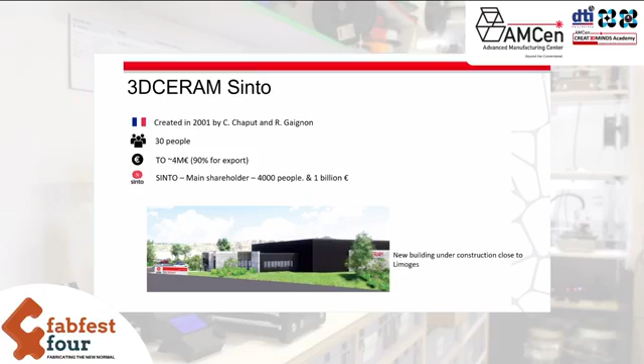We mostly work with a network of distributors and also some subsidiaries of 3D Ceram Sinto. As I told you, our shareholder Sinto is based in Nagoya, Japan. We also have a joint venture in China since 4 years, and a subsidiary in the USA since 2 years in Connecticut. We have more than 30 partners all around the world.

So let's come back to the topic of the day. I think one of the first questions is, what is technical ceramics? People know well plastic, know well metal, but not yet technical ceramic. So we try to answer this first question.

Among the most innovative materials, advanced ceramics are playing an increasingly important role because technical ceramics provide reliable solutions when metal and polymer have reached their limits. Today, technical ceramics have become indispensable to state-of-the-art industries thanks to their unique properties, which could be mechanical, electrical, thermal, optical, chemical, aesthetic, and so on. Due to these properties and their qualities, they are now one of the highest performing materials, allowing a wide range of applications in various business sectors.

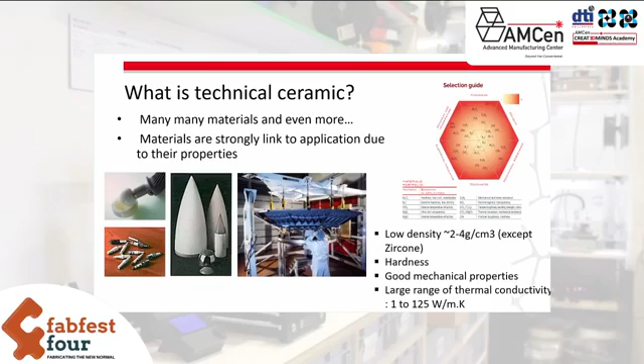This is why high performance and innovation enable advanced ceramic today to address the most complex industrial challenges, as I will explain in the next slide. You have to keep in mind that there are a lot of processes to shape technical ceramics, but all the processes use the same method.

We start with a powder, a raw material, then we have to shape the powder, and then do a firing to obtain final properties. There are many technologies to shape ceramic, such as injection, milling, casting, extrusion, and so on. There are clearly a lot of processes, but all of them need tools and molds, and not 3D printing. This is a big advantage of technical ceramic additive manufacturing compared to all the other processes.

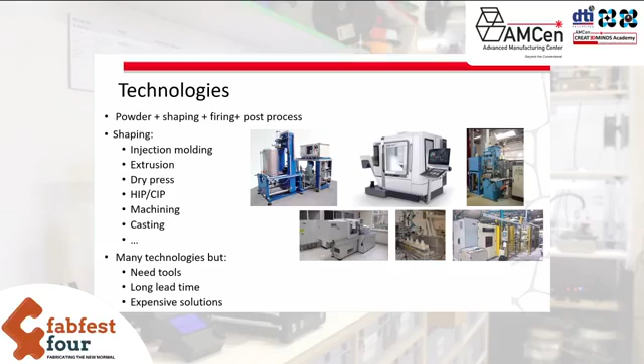With 3D printing, as you know, you do not need any tools or molds in order to shape ceramic, but also metal or plastic. You have to keep in mind that the activity and know-how of 3D Ceram Sinto is to provide solutions for the 3D printing of technical ceramics. At 3D Ceram, we are only focused on technical ceramic parts.

As Angela told you, I am a ceramic engineer. Our two CEOs are also ceramic engineers. So at 3D Ceram, we are a team of ceramic engineers, and we have been only focused, for 20 years, on the printing of technical ceramics.

This is why we have printed ceramic parts on demand since 2001, thanks to an SLA process, stereolithography, that we developed internally. And since 2015, we decided to provide an entire printing line to our customers. Printing line means the printers developed by 3D Ceram, the materials - a mix of ceramic powder and photosensitive binders, also developed by 3D Ceram - and the post-process equipment if necessary, but also some services in order to help and assist our users.

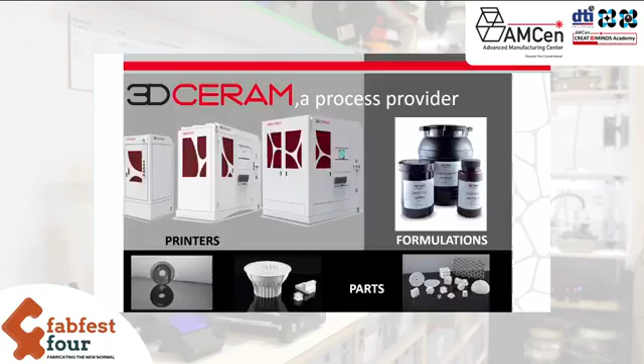So at 3D Ceram, we like to say that additive manufacturing for technical ceramic is a disruptive and complementary technology. Thanks to the benefits of additive manufacturing, it is possible to decrease development time, and so at the end, the time to market. Also, you can produce and shape new designs that you cannot do with any other processes.

As you just need the CAD file of the part, you can do on-demand printing as you do not need any tools or molds. One of the main advantages of additive manufacturing for all materials - plastic, metals, and ceramic - is that you only need the CAD file of the part. But on the other hand, as I will show you, it is still a process with a post-process step and a low output capacity compared to some traditional processes such as injection. This is why I call it an inspiring technology.

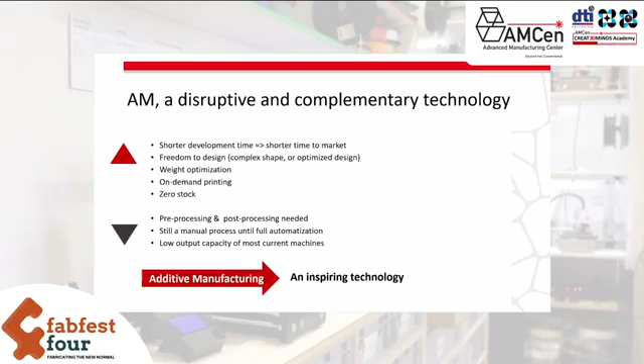Before explaining the process, I want to do a quick focus on what we can call the ceramic AM benefits and the design to function. I will explain it for the ceramic part, but I'm convinced it is the same for all materials. If you want to do the same parts that you are doing right now, don't think about 3D printing - it will bring nothing. You will not reduce the cost. If you are comparing A to A or B to B, forget it. You really need to change something.

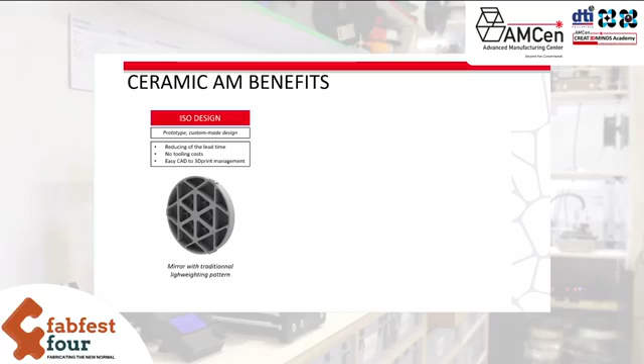So there are three ways to go. Either you start with ISO design - you change nothing, and you hope that by saving molds and tools you can reduce the cost. That's what we call ISO design. Or, second option, you create a new design with new functions inside, which are difficult to make. This doesn't mean it's a complex shape - it means it's a new design that you are not able to do with current technologies.

Or there's what we call disruptive design, when we integrate even more functions and optimize the concept. You may have, for example, different parts combined into only one part. On this slide you can see an example of a traditional part and what we end up with - we decrease the weight and get better mechanical resistance of the structure. In my opinion, this point is very important: now, thanks to 3D printing and additive manufacturing, we have to design the part according to its function, not according to the process that we have in-house.

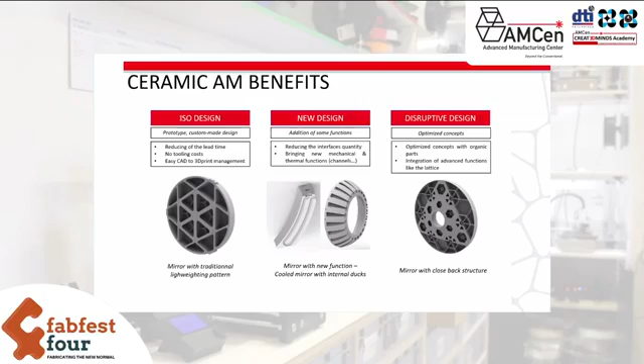Another promising point is the diversity of the market. Quite all the markets - medical, space, energy, automobile, aeronautic, chemistry, and so on - are investing in the process.

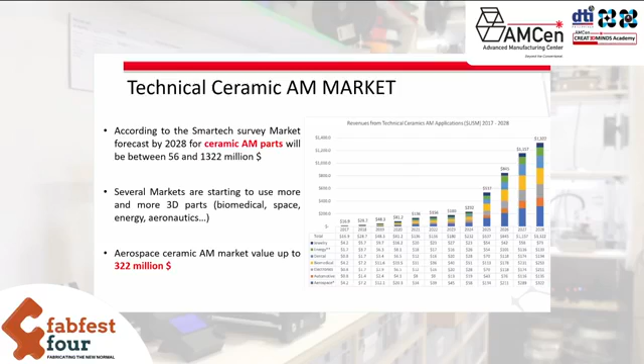Just before explaining more specifically the SLA process developed by 3D Ceram, I want to say a few words about the different processes to 3D print technical ceramic. Those processes can be classified into 5 major families according to the type of method.

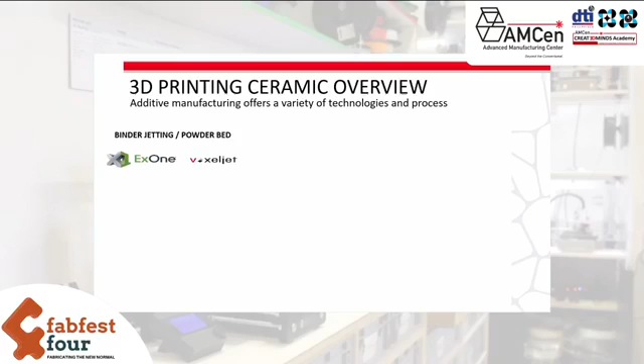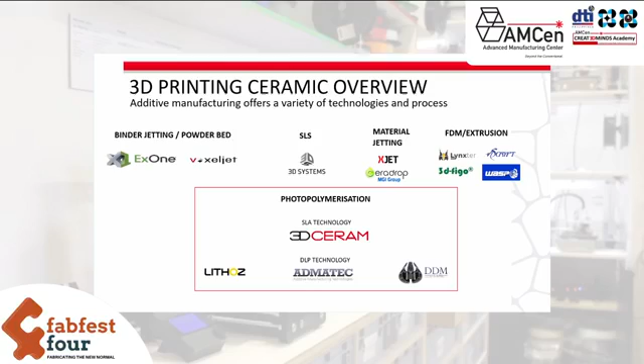You can find binder jetting process, selective laser sintering called SLS, material jetting, material extrusion, and stereolithography, SLA. There's no almighty process - each has its own advantages and disadvantages. The most important thing to consider when choosing the right 3D printing technology is the kind of part the user wants to print. I'll explain on the next slide the interest and advantages of the 3D Ceram process.

A few words regarding the SLA process that we developed. The stereolithography process developed by 3D Ceram uses photopolymerization of materials thanks to a UV laser, very low power, based on the top of the printer. As I explained, the material we use is a mix of ceramic powder and photosensitive binder, and each layer is cured by the UV laser.

The first step is to create the CAD file of the part - nothing special. Then the printer software will slice the part in order to indicate to the laser which area to cure at each layer. Then the printer will print the parts layer by layer, from the bottom to the top.

A blade will spread a thin layer of paste on the printing platform, and the UV laser based on the top of the printer will polymerize the area to be cured. Then the printing platform goes down by one layer thickness. The blade spreads another layer of paste, lasering again, and so on, in order to shape all the parts layer by layer, from bottom to top.

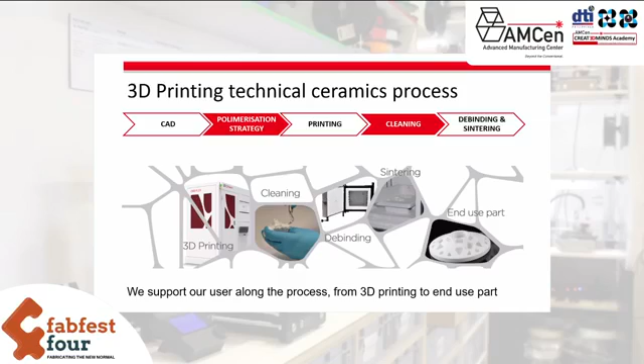After printing, the part is made of a mix of ceramic powder and polymerized binder. This is why we have to do two thermal treatments: first debinding, in order to burn out the binder, then sintering in order to close the porosity and densify the ceramic. It's during the sintering process that we have some shrinkage, between 10 and 20%, which only depends on the chemistry of the formulation.

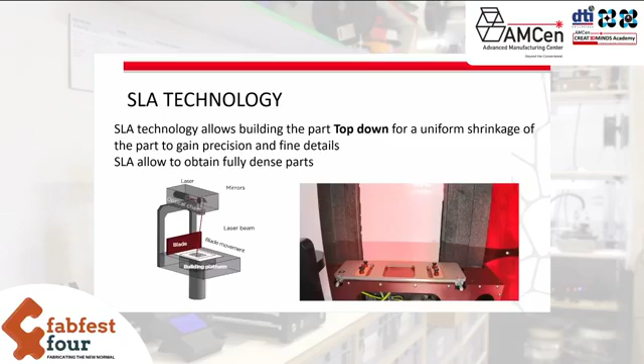So the SLA process developed by 3D Ceram uses a UV laser on the top of the printer, and as I told you, we print the parts from bottom to top, as you can see in the video. The combination of top-down process and UV laser on top allows us to obtain fully dense parts with very thin details if necessary, but also uniform shrinkage during the sintering step.

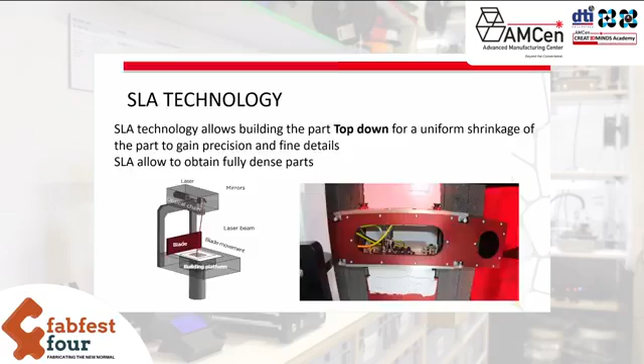One of the main advantages of the SLA process developed by 3D Ceram is the lack of links between the parts and the support. With almost all other processes for metal, plastic, and other ceramic 3D printing methods, you need links or pillars between the parts and support, which require a lot of manual work during post-processing, and also a lot of risk for the ceramic parts.

Thanks to the top-down process and the viscosity of the slurry, we do not need any links between the part and the support, as you can see in the picture and the video.

For example, if we want to print the white part, we design the support in red, and during the printing run, we have a very small gap of uncured slurry between the part and the support. So we don't have any links, any pillars. This is why, after printing, it's very easy to remove the support and just take care of the part.

Making the post-process easy and user-friendly is one of the key points for the adoption of the process by key players and industrial groups.

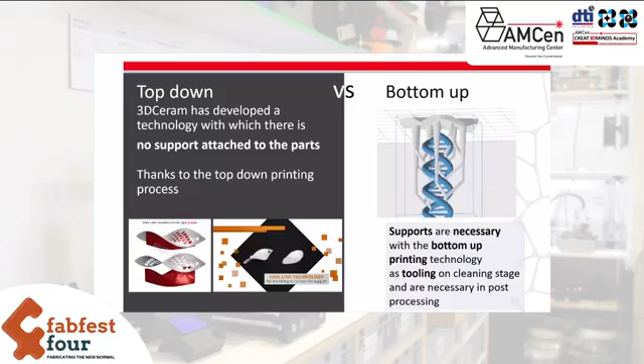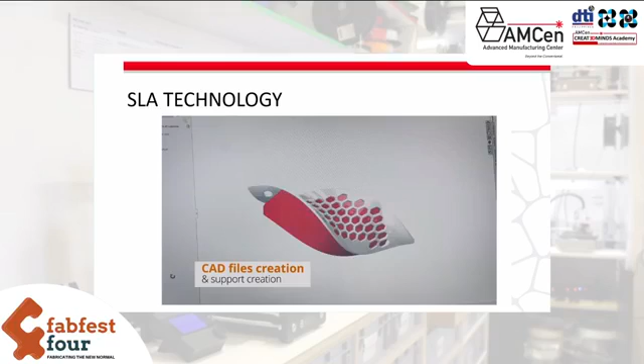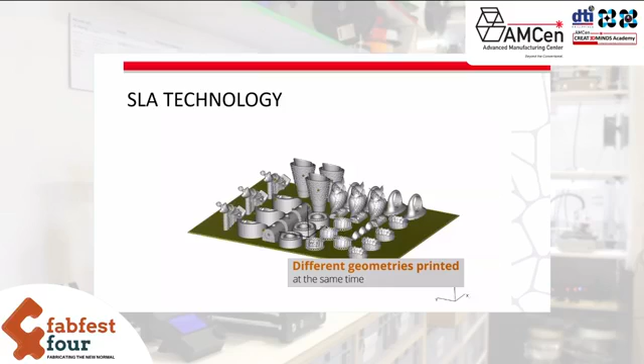Now, I want to show you a short video of the process. As I told you, the first step is to design the part and the support with any design software, could be SolidWorks, CATIA, NX, and so on. Then we send the STL file to the printer software, and the printer software will automatically slice the parts. Slicing means indicating to the laser which area to polymerize at each layer.

Let's have a look into the printer. You have a tank for the paste, the mix of ceramic powder and photosensitive binder. The printing platform is in the middle of the printer. There's the recoater with a blade in order to spread the paste on the printing platform, and the UV laser, very low power, based on the top of the printer.

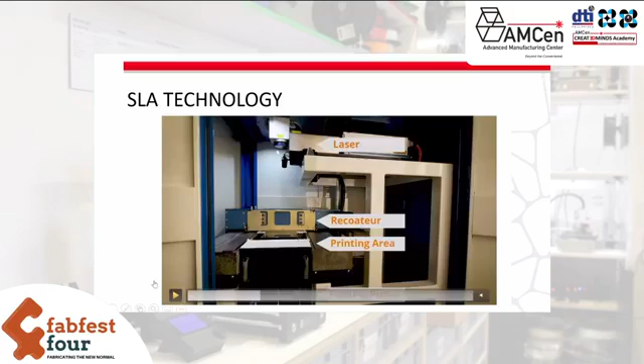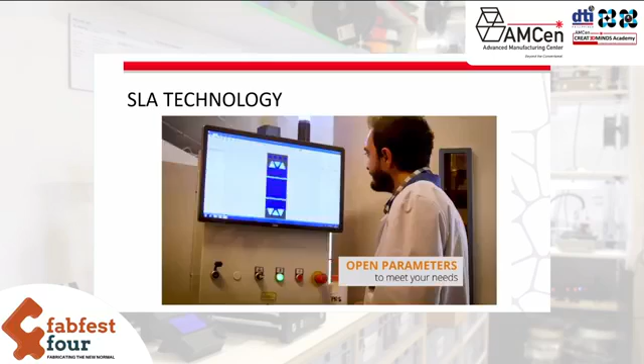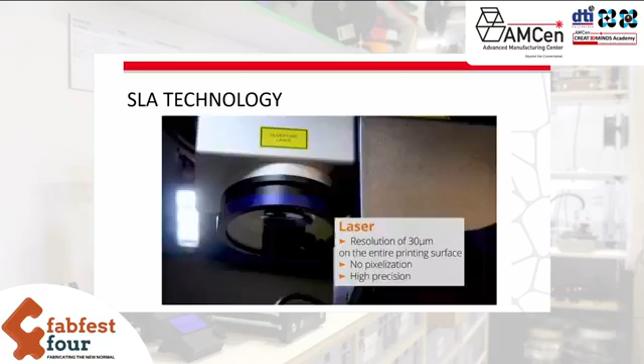I will explain later, but we can have different sizes of printing platform with this printer. You can see the high viscosity of the slurry. At the beginning of the printing run, the blade spreads a thin layer of slurry on the printing platform, and the UV laser, very accurate, cures the area to cure, as you can see in the video.

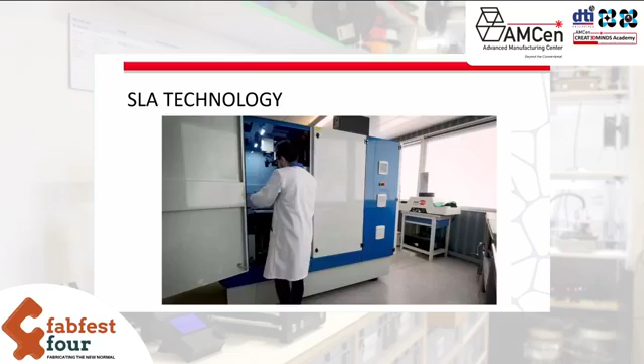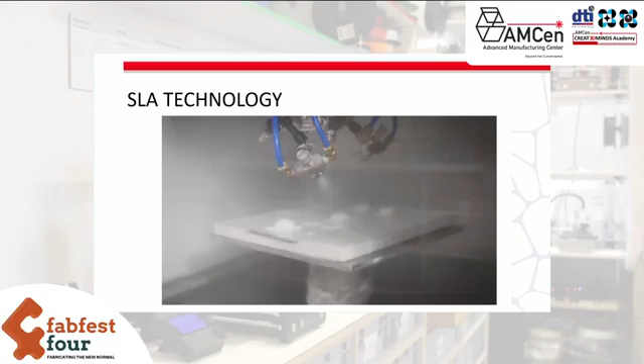After curing all the layers, we remove the printing platform from the printer, and we do what we call the cleaning step. We have to blow in order to remove the uncured slurry in contact with the parts, using a mix of compressed air and a specific solvent in order to remove the uncured slurry in contact with the part.

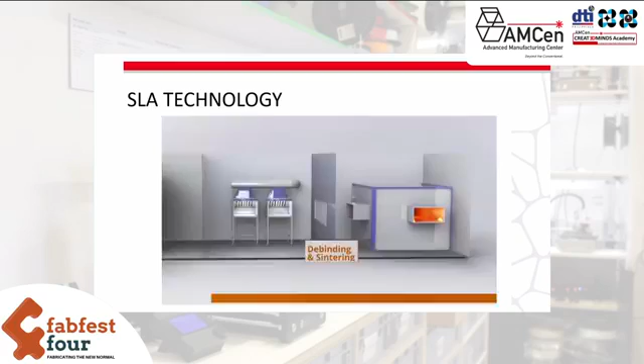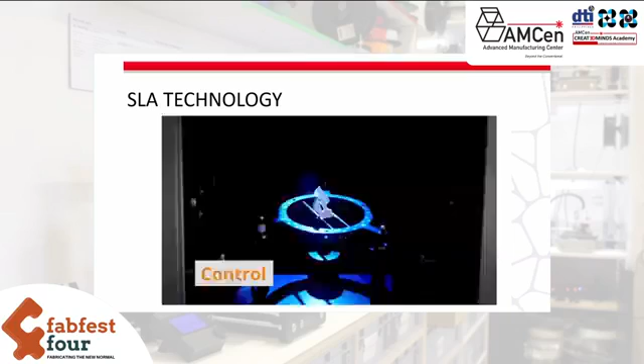As you can see, it is very easy to remove the support from the part. We do not have to cut any links, any pillars, and so on. After printing, first comes thermal treatment: debinding in order to burn and remove the binder, and then sintering in order to close the porosity and densify the part. Then afterward, of course, control of the size of the part if you need, if you want.

So, a few words regarding the mix that we use in order to print parts, called 3D mix. We developed some standard mixes. We can also develop some on-demand mixes with a specific powder. And keep in mind that our users can develop their own mixes and own printing parameters, as all our printers are open printers, open software, so our customers, our users are able to develop their own printing parameters if they want to do it.

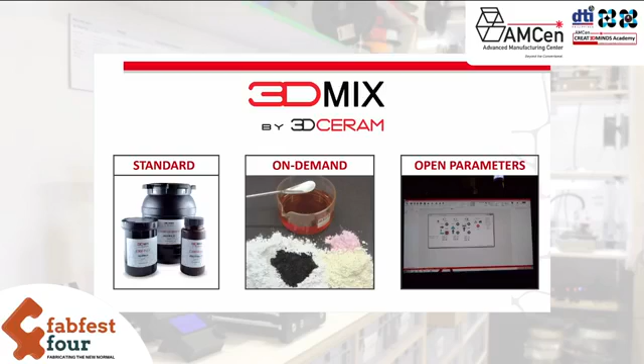About the standard mixes available for our users, we developed some oxides, such as alumina, zirconia, cordierite, alumina toughened zirconia, HAP (hydroxyapatite), and TCP (tricalcium phosphate) for biomedical implants, but also some silica-based material for foundry cores. We also develop nitrides, such as silicon nitride and aluminum nitride, and soon we will offer silicon carbide.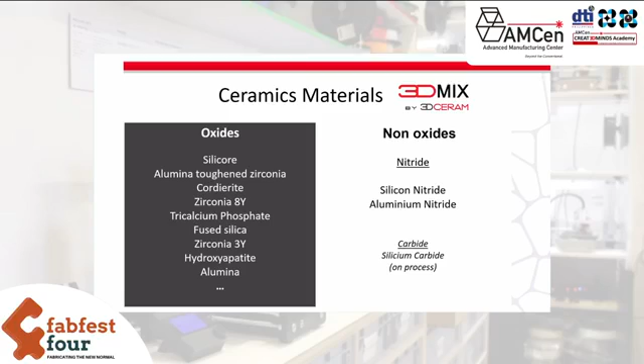Just for your information, nitrides are mainly used for aerospace due to their excellent thermal properties. HAP and TCP are only used for biomedical implants. I will show you some examples afterward. And oxides, such as zirconia, alumina, and silica-based materials, are used for industrial needs.

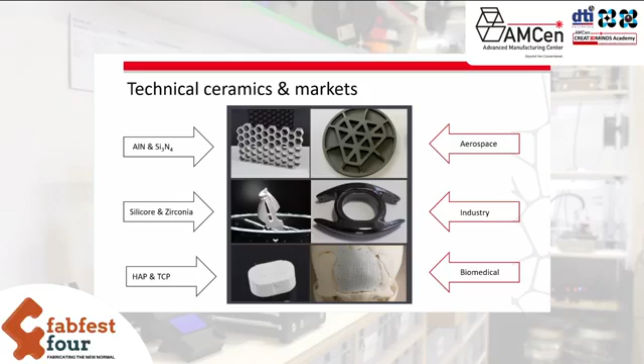So 3D CERAM provides 3 different printers in order to meet all needs, from the lab to mass production. First, the bigger printer, the CERAMaker 3600, with a printing platform of 600 by 600 by 300 mm. Then, the middle size, the CERAMaker 900 Flex, with a printing platform of 300 by 300 by 100 mm. And the smaller one, the CERAMaker 100 Easy, with a printing platform of 100 by 100 by 150 mm, dedicated to laboratories, universities, and research centers.

The most important point is the fact that all the printers use exactly the same process, which is key for the adoption of technical ceramics additive manufacturing. A user or customer can develop new possibilities, new processes with the small printer, and then do a quick and easy scale-up on the big printer. If you develop something amazing at a small scale but cannot scale it up for industrial needs, unfortunately, it will bring nothing.

So for all materials, not only ceramics but also plastic and metal, it is very important to have the possibility to do a scale-up: to develop new things at a small scale, and when ready for industrial needs, to be able to use a bigger printer with the same process. It is clearly a key point for the future of ceramics AM, and AM for all materials.

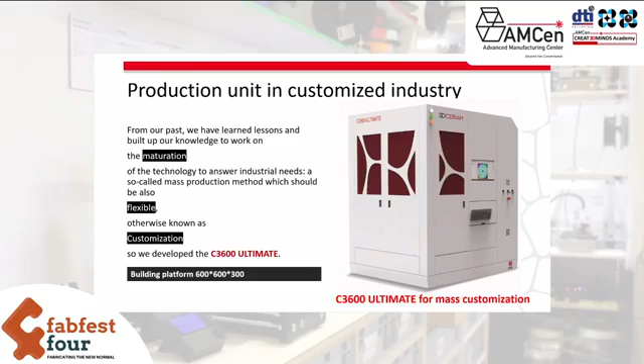But you have to keep in mind that additive manufacturing is a way to open new markets, new geometries. Engineers can think differently about how to print the parts, how to add functions, how to group several parts together to make only one part.

Thanks to our 20 years of know-how in printing parts, because remember, at 3D Ceram we started printing ceramic parts in 2001, thanks to that know-how we can advise and assist our users with ROI, return on investment, which is clearly a key indicator for investment.

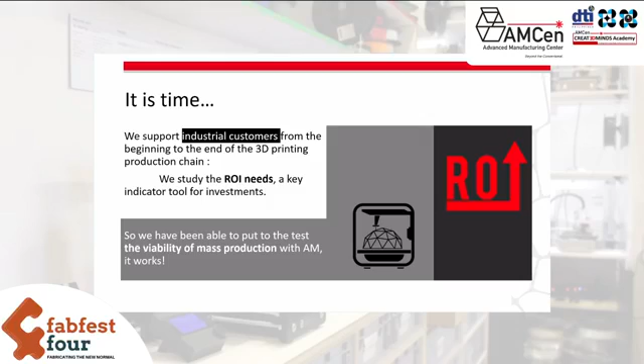Then just a few words about the C100 Easy, with a printing platform of 100 millimeters square by 150 mm. This printer is developed for laboratories, universities, and research centers. The objective is really to play with it. It's what we call a user-friendly printer, and users can launch a production in 20 minutes.

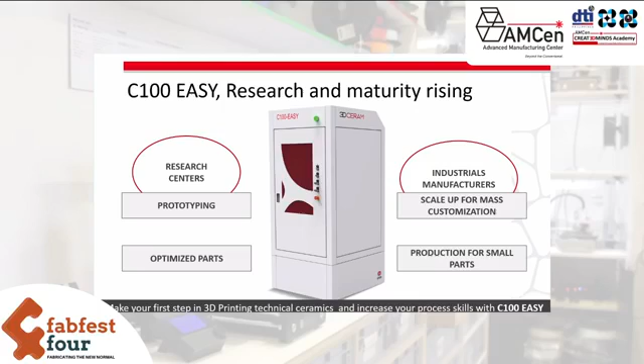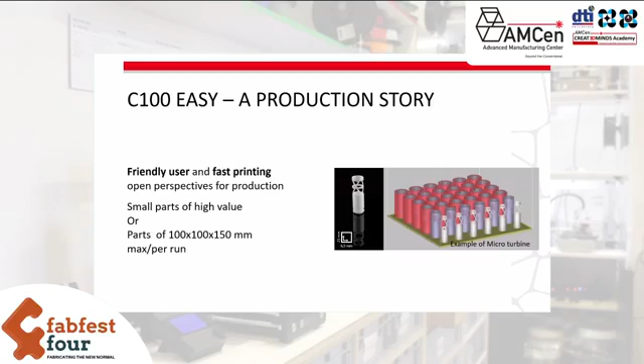And to finish with our range of printers, our historical printer that we developed in 2005, the C900 Flex, comes with 3 different sizes of printing platform. So with the same printer, it's possible to use 300 by 300 mm, but also 300 by 200 and 300 by 100 mm.

This possibility to use different sizes of printing platform with the same printer is very useful, because you just have to take care of the size of the part and the number of parts you want to print, and you can adapt the size of the printing platform.

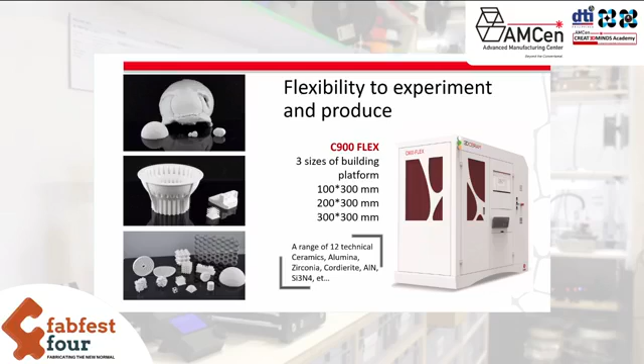So to compile, as I explained, 3D Ceram provides a large range of printers, from lab to mass production, small, medium, and big size. But one time again, and I really want to insist on this point, all the printers use the same process, which is clearly a key point for us.

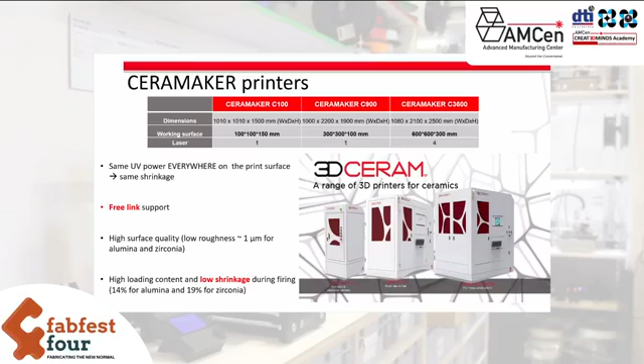So, is this process ready for mass production? I will try to give you some answers today. We have to keep in mind how technical ceramics additive manufacturing can meet industrial requirements to be used at a large scale.

First point is to be able to provide a printer in order to print a lot of parts, and big parts. Second point is to provide a range of printers with the same process to allow a quick and easy scale-up. This is exactly what I explained on the previous slide.

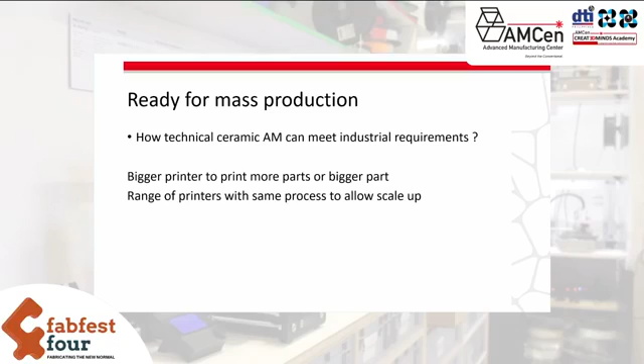Then, it's very interesting because the COVID-19 pandemic has forced some companies to question many things and has revealed how volatile supply chains can be, because many companies cannot reach out to their suppliers, or suppliers cannot produce parts due to lockdown, for example.

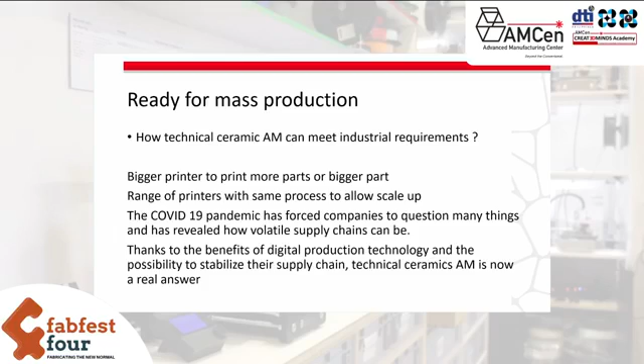And thanks to the benefits of digital production and the possibility to stabilize the supply chain, technical ceramics AM and SLA is now a real answer. I will show you some examples.

This first example concerns a cryogenic optical support for a mirror at 80 Kelvin, so cryogenic temperature. For these applications, we need to reduce the weight in order to reduce the thermal mass of the part, but keep the outer surface of the allowable volume, and also have as low roughness as possible.

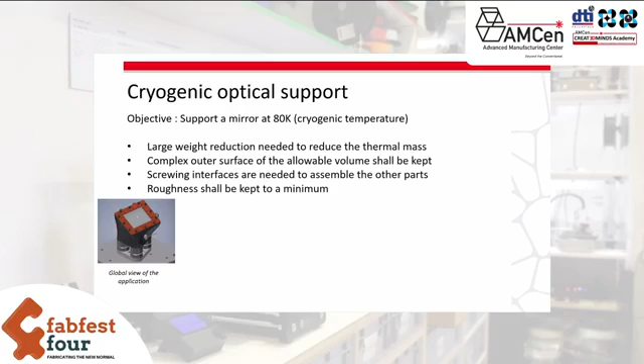You can see on the picture below the first design that we received. This design was made for metal milling. So after redesigning the part for ceramic AM specification, we printed it with alumina, we sintered it, and the customer at the end did the brazing of the metal insert, the titanium insert. This is a first example of a concrete application.

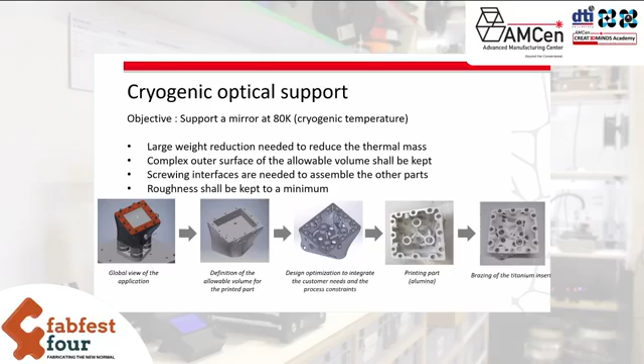I want also to share with you this case of parts printed with silicon nitride, Si3N4. As you might know, silicon nitride is one of the ceramics most used for space applications due to its thermal and mechanical properties.

But first, it is not so easy to print silicon nitride. And it's also complex to obtain good quality after sintering, and good quality means quality conforming to the space applications.

This prototype, this design that you can see on the slide, was designed by the French famous company Thales Alenia Space to represent a critical shape for space application. The global part is a hub, and we isolated and designed part of this hub to print it. So you can see on the slide some pictures of the parts after printing and sintering. But as I told you, printing silicon nitride is only a first step.

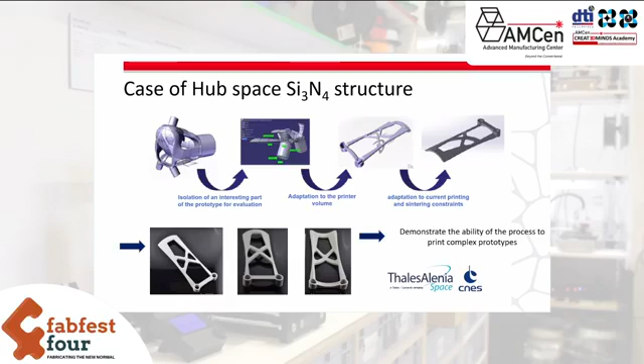To obtain a good quality of silicon nitride after printing and sintering is the final objective. This is why, still in collaboration with Thales Alenia Space, we print some beams in order to check the mechanical properties. After printing, sintering, and 4-point bending tests, we obtain very high density.

As you can see on the graph, density is superior to 97%, and 4-point bending strength has shown very good results. We obtain a tensile strength of approximately 800 MPa, megapascal, and a Weibull modulus of 11.5. These results are very, very good, and they meet the specification for space, as they are similar to silicon nitride made by traditional process.

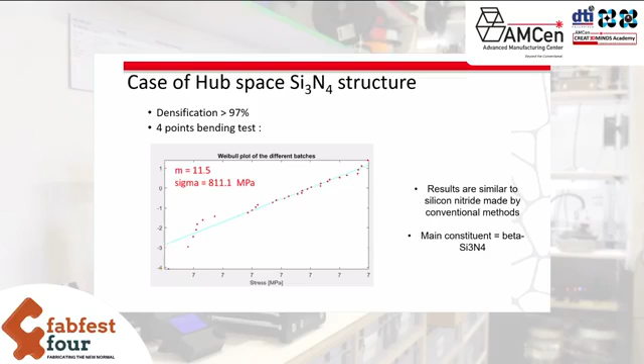I just want to insist on the point that in this case, we are speaking of pure silicon nitride, beta silicon nitride. It is not a derivative of lower purity. It is crucial for all of us to demonstrate that 3D printed ceramics can obtain the same properties as ceramic made with traditional process. It is clearly a key point for the adoption of the process.

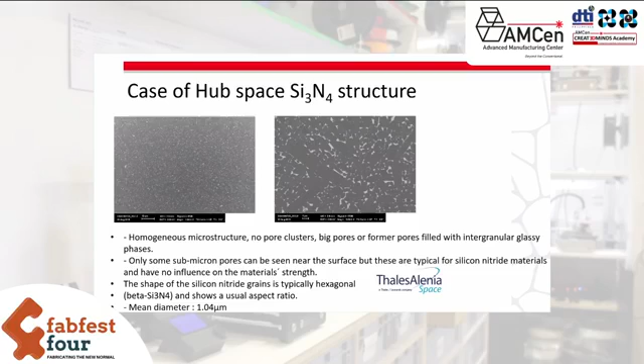Just a few words about the microstructure of the parts, which confirms what I explained a few slides ago. The pictures taken after sintering show a homogeneous microstructure and no pore cluster. As you can see, the shape of the silicon nitride grains is typically hexagonal, which is good and typical for beta silicon nitride.

Then I want to share with you one of our latest applications, antennas for nano satellites. During this year, we successfully achieved a big project with one of our users who produce antennas for nano satellites. Nano satellites are made for low Earth orbit at approximately 400-600 km from the Earth, mainly for telecommunications, and the antennas are made specifically for telecommunications.

The first interesting point is that they need ceramic, specifically zirconia, due to its excellent permittivity. And they need 3D printing, specifically SLA, to produce lattice design parts with low roughness, thin details, accuracy, and also repeatability. The lattice design increases the properties of the antenna and of the ceramic parts also.

The first zirconia part into a nano satellite will be in space in a few weeks. As you might know, with the nano satellite constellations, the future is very bright for this application.

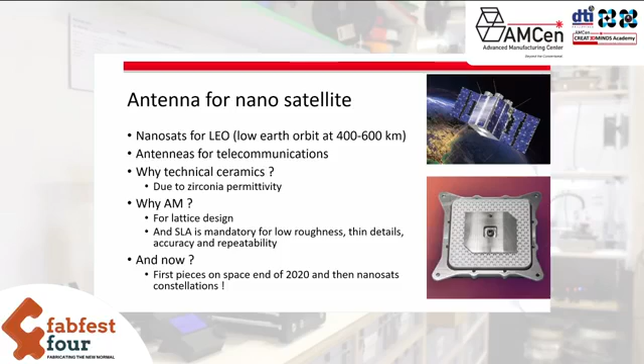As I told you on the previous slide, the ceramic parts printed with SLA process can be used for satellites, for new space - what we can call new space, small satellites. They need small ceramic parts as the thermal management is much more complex and tricky for them in order to obtain the final performance. This is why a large range of ceramics can be used, such as alumina, zirconia, silicon nitride, or also aluminum nitride.

And the applications are also broad. It could be used for thruster, for heat insulator, or also optical parts. You have to keep in mind that optical application is one of the bigger markets for new space, but also structural application, where you use the properties of technical ceramics such as silicon nitride or alumina, and you can really have a structure which will not be deformed with the difference of temperature in space.

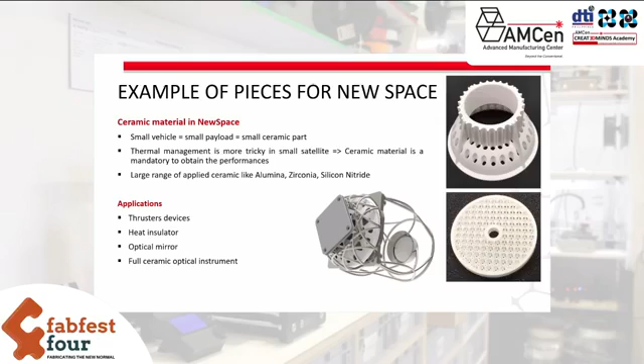Another application very promising for technical ceramic AM that I want to share with you is foundry cores for investment casting. You have to keep in mind that foundry cores are an essential part of the production of blades for combustion engines. The blades are used to cool down the engine while in use, to facilitate the workings of the motor, to lower the fuel consumption, and to decrease the engine emissions.

This is why the need for complex core design has increased dramatically with customer demand for smaller, more efficient, and cost-effective engines. Currently, in order to produce foundry cores, users have to produce and assemble a lot of small injected parts. So it is long, it is complex, and it generates a lot of waste. Thanks to 3D printing and the SLA process, they can produce the same design in one piece, with an even more complex and efficient design.

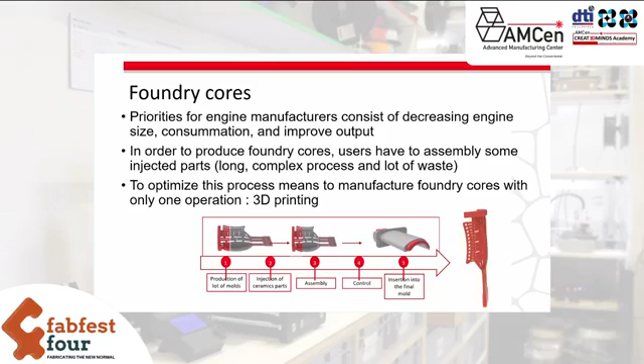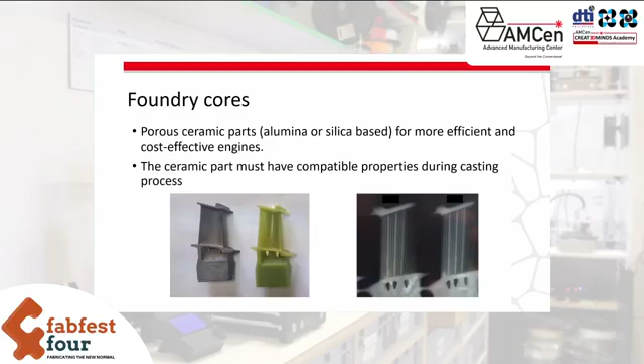Foundry cores are made of porous ceramic, either alumina or silica based. They are porous because users need to remove the ceramic parts after metal casting. This is why the quality and properties of parts are complex to achieve, combining refractory properties, low shrinkage during casting, and mechanical properties. On the picture, you can see the first part cast into metal without any defect, confirmed by a CT scan showing no defects after casting of liquid metal on the ceramic part.

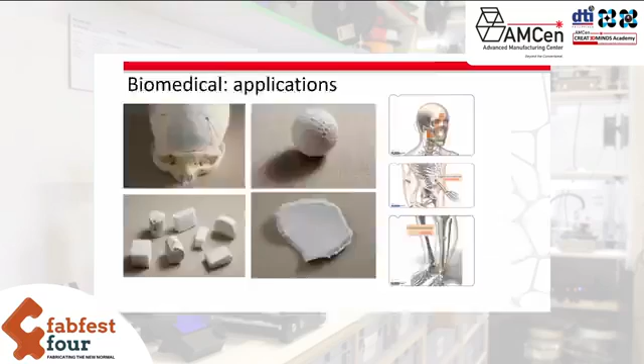First, I want to explain in more detail the skull implants. The use of 3D printing for skull implants is obvious because nobody has the same defects, but that's not the only reason. Thanks to 3D printing and the SLA process, you can have several functions in one part. For example, on the skull implant you see on the slide, there are 3 different functions.

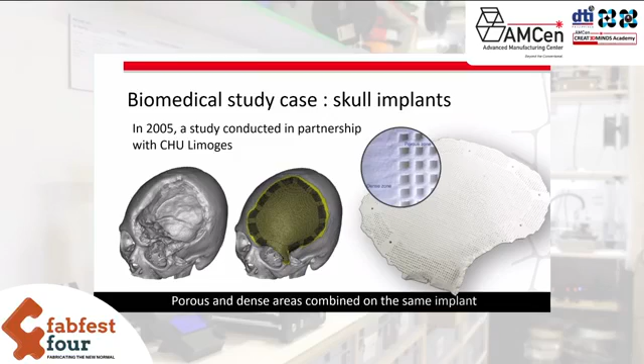First, we have a porous area within 2 centimeters of the border, which allows osteo-integration of the part after the operation. Then we have a dense area in the middle for mechanical property and stability. And then we have some big holes all around the part, which allow the surgeon to fix the implant to the skull with bioresorbable wire. So on the same part we have 3 different functions, and only SLA and 3D printing can allow that.

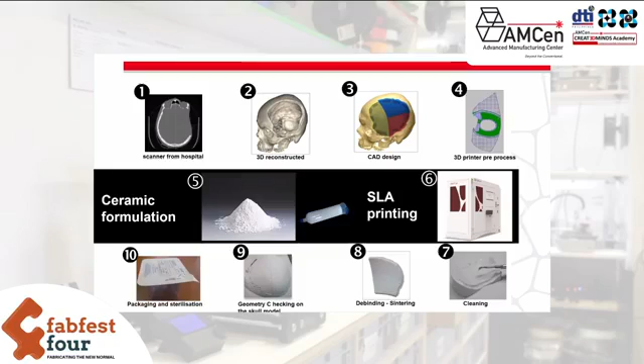A few words about the process to print and produce such a part, a skull implant. First, the user receives the scanner from the hospital. Then, steps 2 and 3, the user has to redesign the skull in order to design the implant. Then the printer software will slice the part, and after printing we have to clean, debind, and sinter the part. Then, steps 9 and 10: after sintering, the user has to check the geometry of the part and sterilize the implant for the operation.

I'm sorry for the graphic picture, but I think it's very important to show that this is not only slides, not only my words. It is reality today to use ceramic additive manufacturing for implants for real human patients. You can see a case for orbitofrontal implants. The hospital sent us the scanner of the patient, we designed the part, and we printed the part with HAP.

You can see a picture during the operation, and the scanner one year after. It's very important: you can check that there is no gap, no hole between the skull and the implant, because the osteo-integration of the part was excellent, as the chemical composition of HAP is very close to bone.

Another very interesting case, because the lack of skull was very important—this was about 5 years ago. As you can see on the slide, we printed the implant in 3 small parts, the blue one, the red one, and the yellow one, because the surgeon was more comfortable with 3 small parts than 1 big part.

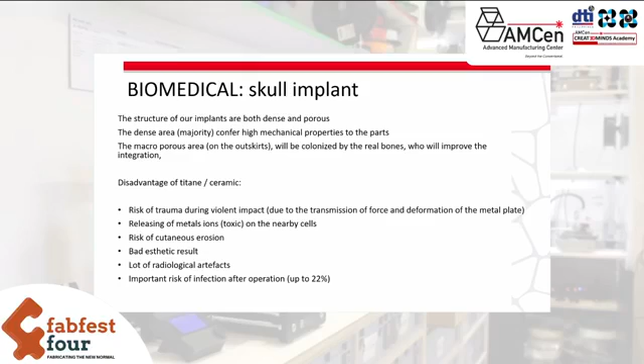On top of skull implants, cages, and ACE implants, users can also print sinus floor parts and encapsulation boxes for electronics, for example pacemakers. More and more of our users use 3D printing to print dental parts with zirconia, but also non-implantable parts such as surgical tools with alumina and/or zirconia.

Now I want to speak with you about the hybrid process. The hybrid process is a new process that allows printing ceramic and up to 3 other materials at the same time.

We made the choice to develop it with the same process. So we use the same process and same printer with SLA process for the main ceramic, with UV laser on top, and we add 3 specific nozzles in order to deposit the other materials. Before any deposit, we blow the uncured paste in order to remove it and create a gap. I will show you some video on the next slide. But the most important point about the hybrid printing, which we can also call multi-material printing...

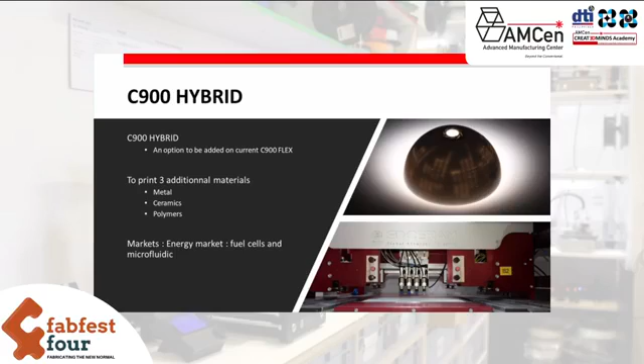You have to keep in mind that printing is just one step. After, you have to do debinding and sintering. And during the sintering step, you will have some shrinkage. So if you print a hybrid part, all the components inside must have quite the same shrinkage in order to avoid any cracks, any decohesion during the sintering step.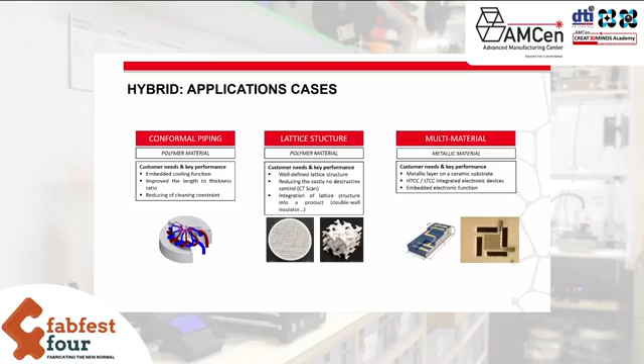So as I explained, the aim of the hybrid process, the multi-material process, is to deposit plastic, metal, or something else on the ceramic substrate. Just before showing you some videos, I want to explain the flow chart.

You have to keep in mind that the hybrid process is again a layer by layer process. We print a hybrid part layer after layer. So the flow chart is this one. First, we scrape the ceramic paste on the printing platform. This is the same as the standard process. Then we cure the ceramic paste only on the area where we need fully dense ceramic at the end. So again, the same thing is done: we scrape and we cure the ceramic paste.

Then we blow the uncured paste with a specific nozzle in order to create a gap, a groove, on the area where we want to deposit another material. We blow with compressed air. After blowing, a specific nozzle, which we can also call a dispensing system, will come in order to deposit the other material into the gap, into the space. And then to finish, the UV laser will cure the other material in order to have something stiff, something stronger.

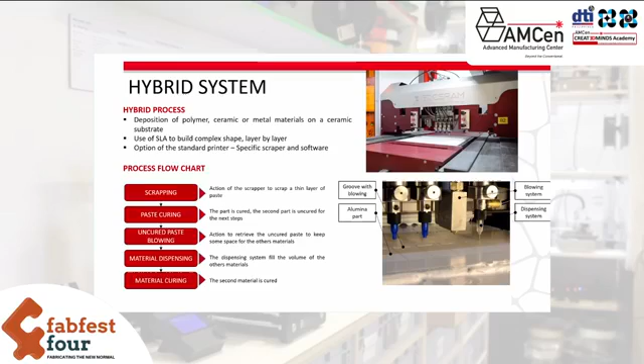And then we do it again: scraping, curing, blowing, printing, and curing. I will show you some video. I think it will be more clear.

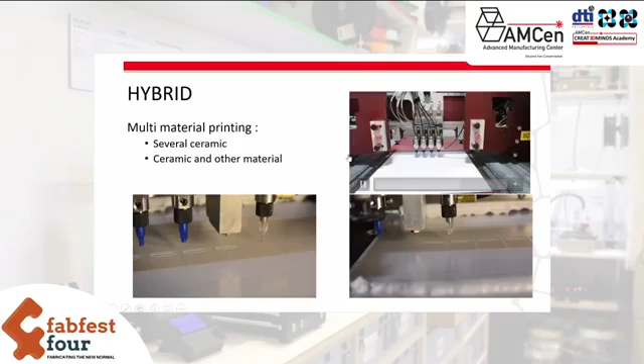So on the top, you can see, as I explained, it is the same printer, okay? And we had a specific scraper on top with 3 nozzles in order to deposit up to 3 other materials.

Then, second video: as I explained, after the scraping and curing of the ceramic paste, a specific nozzle will come in order to blow compressed air. So it is exactly what you can see on this slide. The specific nozzle blows compressed air, only compressed air at low pressure, in order to remove the uncured slurry on the area where we want to deposit another material. So we blow compressed air in order to create a gap, a groove.

And then when all the gaps are created, a specific nozzle will come in order to very accurately fill each gap. I'm sorry, on this video it is not easy to see because we fill the gap with plastic, so it is transparent. But I can tell you this nozzle fills each gap, each groove, with plastic. So these are some videos to illustrate the hybrid process for printing multi-material parts.

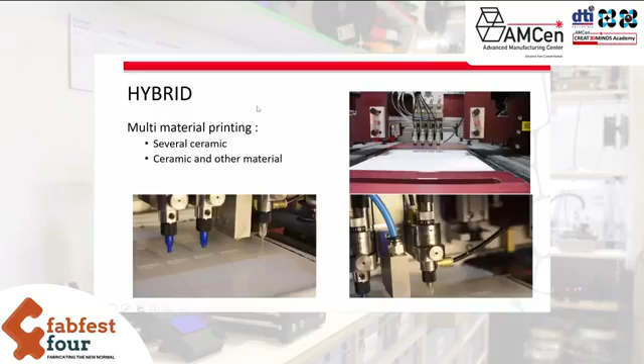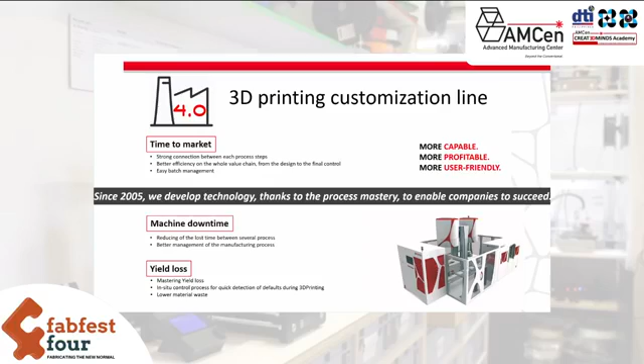I want to share our vision for the coming years. The next development we're presenting to customers is an automatic line. Right now, as I explained, we print, clean, debind, and sinter the parts. What we promote is an automatic line where the customer just loads the paste into the printer, and everything is done automatically with loading, printer, cleaning device, and kilns. We are developing this automatic printing line to decrease wasted time between each step of the process, and also increase profitability.

I want to add a few words to conclude. While the current situation is very bad for the world economy, I see some big players now realizing the potential of additive manufacturing, because people are thinking differently and considering digital production technology as a real means to overcome these issues. This is why the technical ceramic AM market is expanding, with growing demand for industrial printers that can print big parts, a lot of parts, and ceramic with good quality. I believe the time to use additive manufacturing for mass production is coming, and the applications already on the market and qualified that I showed you are a real signal.